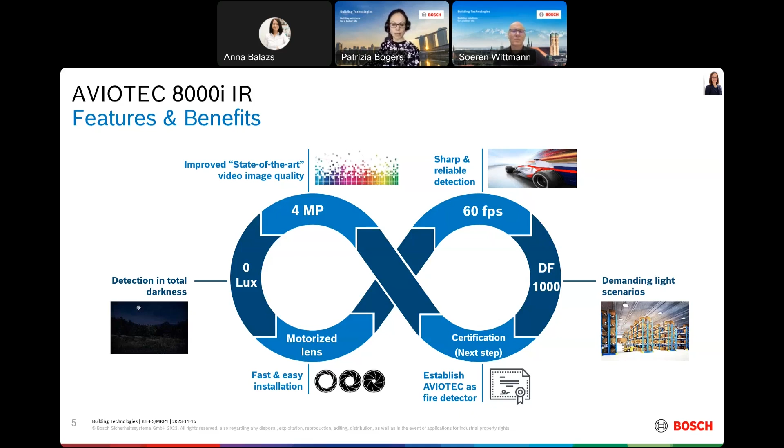So now we jump towards requirements and limitations, and let's check if Sören is connected to us. I hope you can understand me. So Patrizia, would be great if you can switch to the next slide.

Let's see what has changed regarding AVIOTEC, what we all know from our former product. For the new AVIOTEC, we go down to 1 lux detection in color mode and 0 lux in monochrome mode. As Patrizia said a few minutes ago, we have an integrated IR illuminator which turns on if it gets too dark. So therefore we have continuous detection from nighttime and daytime over the whole range of light illumination.

For smoke detection size and flame detection size, it stays at what you know. We need 1.6% of picture width to detect smoke and 1.1% to detect flame in the image. Regarding the maximum dynamic factor, specified by the darkest and brightest spot in the same image, we can now work up to factor 1000, meaning even if you have a very dark environment with 1 lux at one point of the image, you can have 1000 lux at another position in the same image.

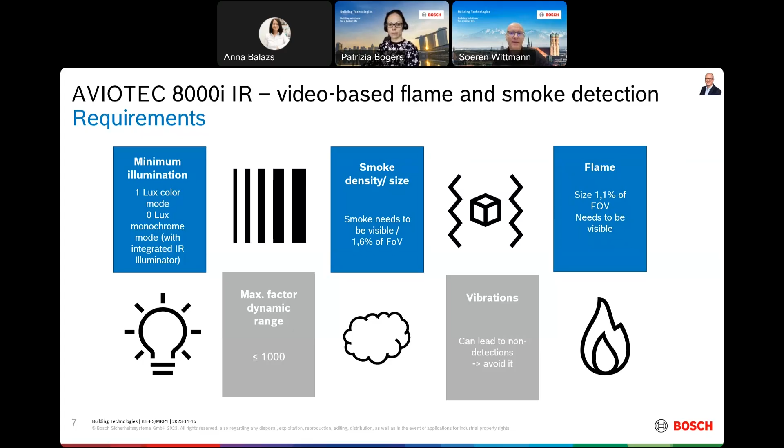Regarding smoke density, what is AVIOTEC 8000i IR capable of? We need smoke which is visible in the image, and this means it could be even very, very thin smoke which we could detect. With this approach, we could now detect smoke in the very early beginning phases of the fire, which is a great improvement regarding what you know in the market.

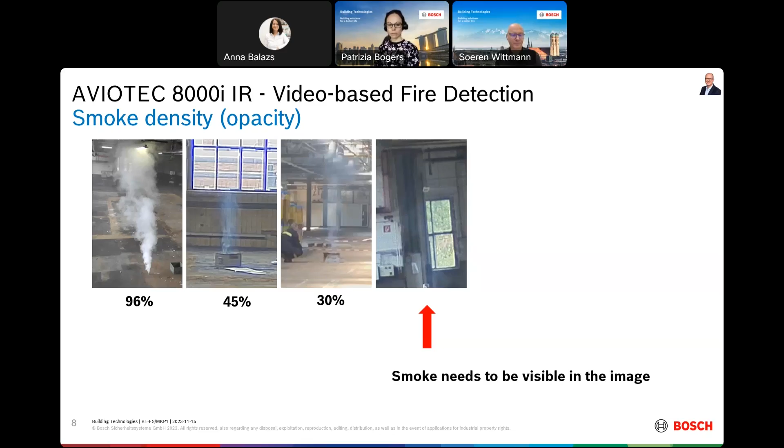Next slide please. The detection distances, as I said, the sizes we could detect in the image: 1.6% for smoke, 1.1% for flame, stays the same. The detection distances also stay the same as what we know from our former product. So here for 50 centimeter flame, we could detect at 50 meters distance, and also 75 centimeter smoke.

This is something around what you face from the standard test fires according to the EN54 standard. We could also detect at 50 meters distance. So 50 meters is the distance we could cover with the opening angle of the AVIOTEC. This table shows a little bit different opening angles and different fire sizes, and what distances could be covered by AVIOTEC.

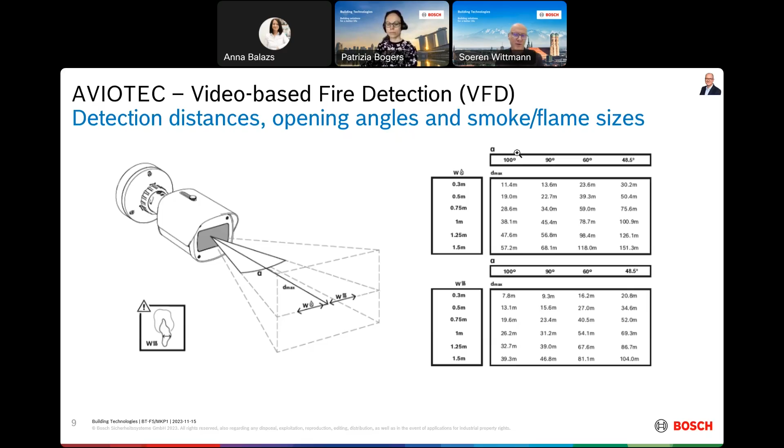So let's have a short look at how it works. Thinking about AVIOTEC, a video-based fire detection system, our intelligence is built into the camera itself, so we don't need additional servers to analyze the video footage. The algorithms are in the camera. The camera has the relays, alarm and trouble relay, and the camera decides if there is an alarm or not and triggers the alarm.

So how does it work? If we have an event somewhere in the field of view of the camera, a flame or smoke, the camera analyzes the video footage itself in real time and decides by artificial intelligence with deep learning if there is a fire or not. If it detects the fire, it triggers the alarm via the relays.

You could also connect, for example, video management systems to the camera to have this information transmitted via ONVIF, MQTT, and so on, to give the alarm to this video side of the detection. You also have optional connections, for example via cloud, which you can use to transmit the alarms and video footage to mobile devices. Later on, Patrizia will give you an overview of the use cases, what can be done with AVIOTEC.

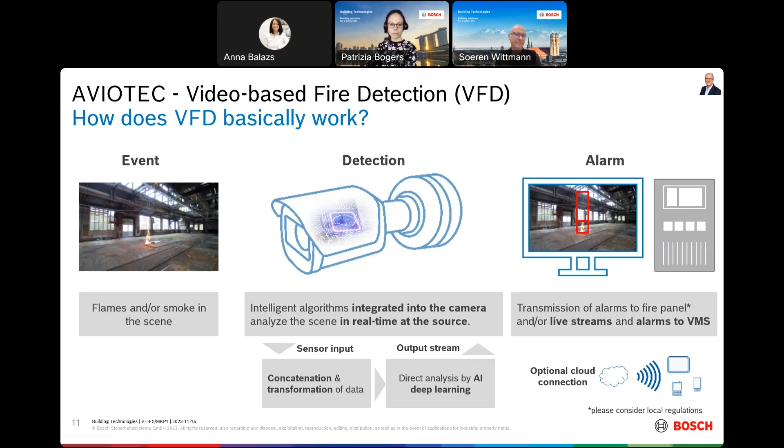If we look at fire development, there are two lines where we can work. One side is the smoke development if we have a smoldering fire starting, and then at a certain point you will have a flame which breaks out.

These are the points where flame detectors can detect, or if the fire is spreading and developing so the heat gathers below the ceiling, then a heat detector can detect. Regarding smoke detection, normally the fastest detectors are ASDs, aspirating smoke detectors, and then you have beam smoke detectors or point detectors which can be used.

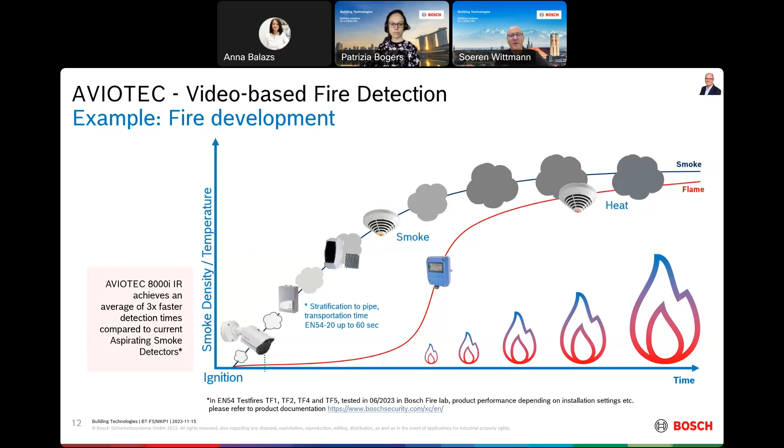Now Patrizia shows one of the videos from our fire lab. The setting is a TF2 test fire, a smoldering wood test fire with an illumination of 0 lux, so no visible light. What you see is the illumination by the camera, and what you can also see is that we have a detection here, at the left and at the right side, from 2 different cameras - one mounted very low and the other a little bit steeper from the upper corner of the fire lab.

As you see, even if the smoke is not well visible to the human eye, AVIOTEC has already detected it. The settings we used for this test were sensitivity of low in our fire detection and a verification time of 15 seconds. I guess this gives a good impression of what AVIOTEC is capable of.

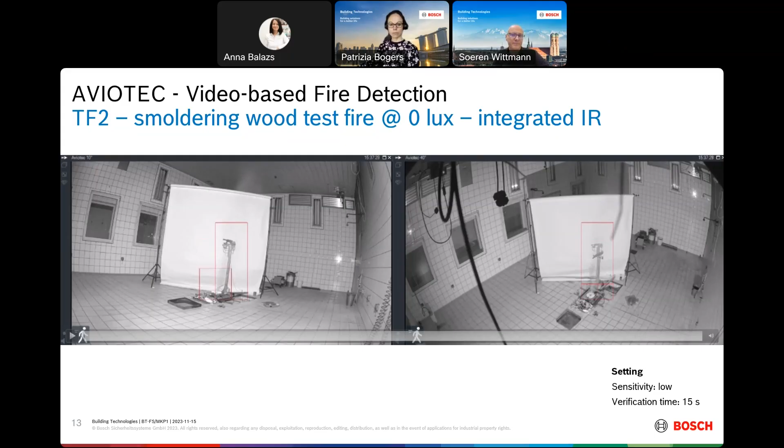Looking at the next slide, we can now go to the use cases and applications, but I guess, Patrizia, this is your topic. Thank you, Søren.

We have now heard a lot about specifications, requirements, and technology of the new AVIOTEC 8000i IR. Now we should discuss where the camera can successfully be implemented based on its features and benefits. First, I would like to start with some general basics. We all know there are 3 main objectives a fire detection system has to fulfill: it has to be fast, reliable, and robust - all at the same time, which makes it very challenging.

In this context, current state-of-the-art fire and smoke detectors might not fit every application. Given high ceilings, large semi-open or open spaces with possible dust and moisture, conventional fire detectors take too long to identify the hazard. They need additional maintenance and cannot be installed in semi-open or open areas. These are the limitations of conventional fire detection systems.

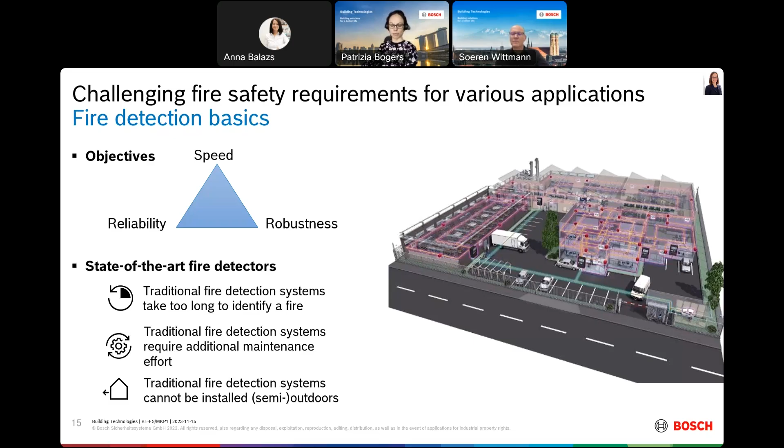Now, when it comes to AVIOTEC, with improved new features like the all-in-one solution, improved video image and scenery processing, robust IP67 housing, and improved, stable algorithms, the camera works effectively in many different applications and scenarios. The new camera performs fast, customized, and reliably on-site in indoor and half-open spaces, also in windy, dusty, humid, and steamy conditions, as well as demanding light scenes.

Key applications are places where high fire load material is stored that can easily ignite and spread over the area, as well as locations where overheating, brakes, or electricity can be a fire source. Thus it perfectly fits diverse industrial and manufacturing facilities like pulp and paper, food, textile, and automotive, and it also addresses applications in logistics and warehouses, shopping malls, hangars, train and metro stations, and energy premises.

Additional to these indoor applications, we want to develop AVIOTEC with improved features also towards outdoor applications, which opens the door for various further potential use cases like outdoor storage, parking spots, electrical car charging stations, and not to forget photovoltaic plants. Often AVIOTEC is the only solution in this context for smoke and fire detection that works in these challenging areas. We want to take the chance to develop and establish AVIOTEC as a well-known, customizable, innovative, and step-by-step certified and reliable solution on the fire detector market for all these applications.

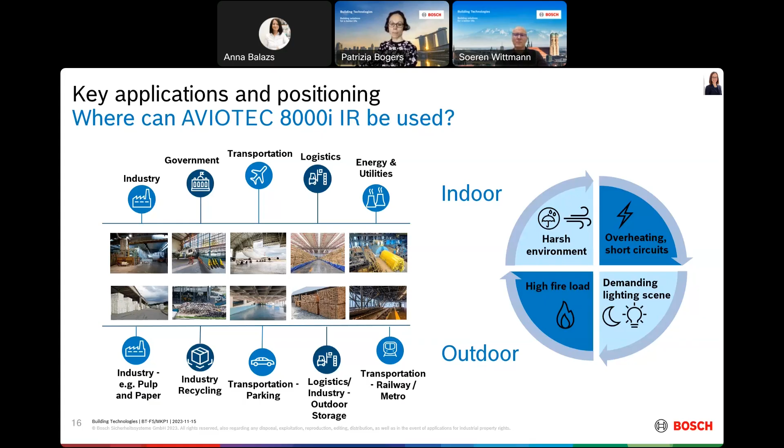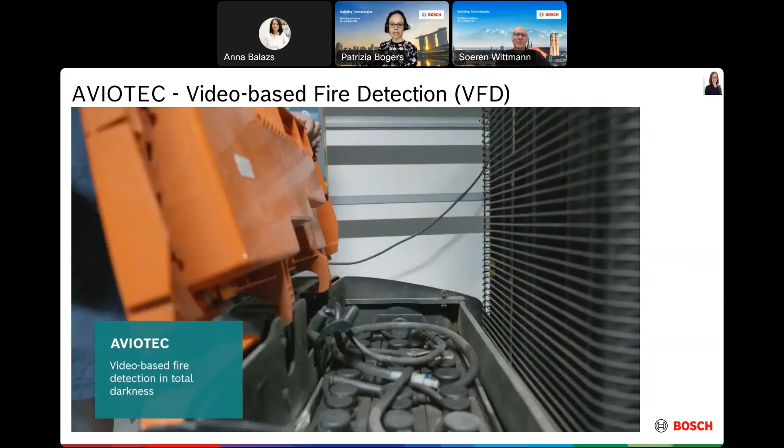Here you can see a video showing the performance in full darkness. It is an industrial application with an incident, how it can happen with charging logistic vehicles. You see the view for human eyes in a second, as well as this one from the perspective of the camera. It shows detection performance even in demanding light scenes like this one, down to 0 lux.

Now, after the pre-alarm session, you will quickly see that the alarm is triggered by the red box.

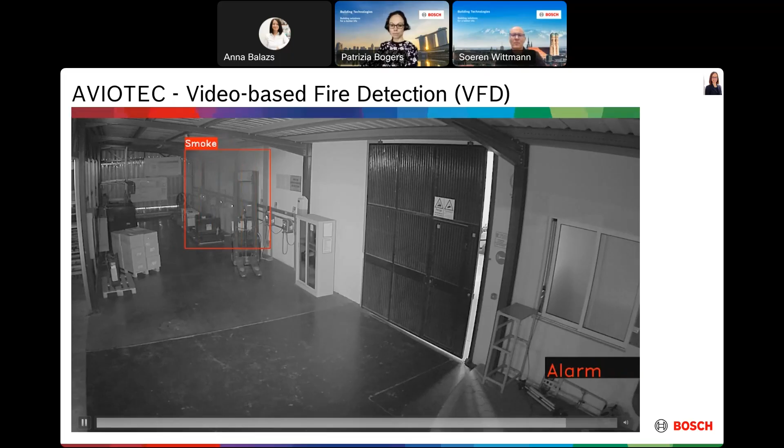In the next video, you see a typical application within the warehouse industry, where AVIOTEC can perfectly serve the need of early smoke detection. In large open halls between corridors of high racks, where it's hard to smoothly run conventional fire detection systems, the camera is able to detect fast and reliably, for example, this smoldering fire event that you see on site, so that countermeasures can be taken in time.

Again, the red alarm box, and now the countermeasure can take place.

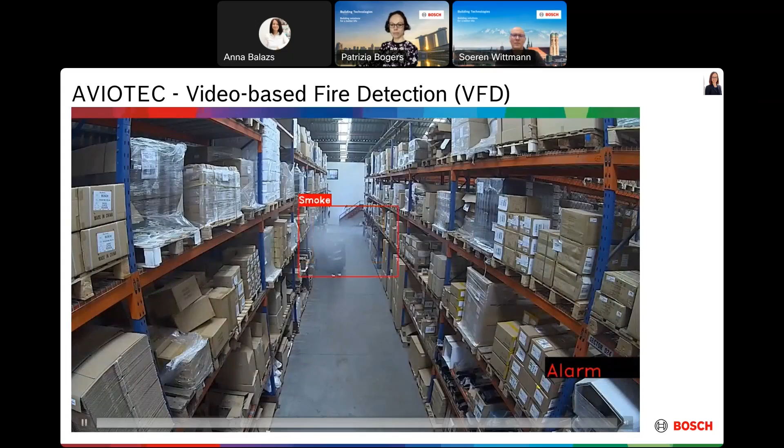So after these use cases and insights into possible applications for AVIOTEC, now we come to the already mentioned system overview of the camera.

First of all, there are two options to program the camera. You can either set it up via a local network by browser or with the configuration manager, or you program it remotely via router and remote portal.

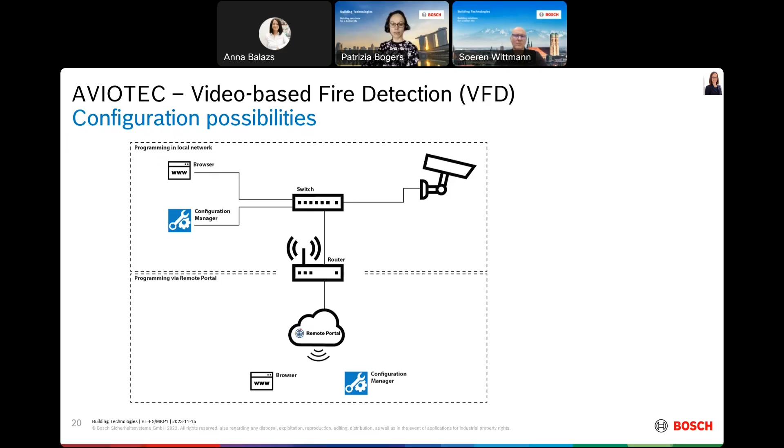In the next step, we want to give you an overview of how the output streams and signals of AVIOTEC can be connected and used as further triggers. First of all, you can connect the camera, as Sören has already mentioned before, to a network with different possible protocols via a network switch.

The camera contains two SD ports for recording the video and metadata stream within the camera. You can also do a larger recording on an external storage space like DIVAR or the BVMS.

Via network connection, one can connect the camera output to a local control station where trained staff can verify the alarm output given by AVIOTEC and decide whether to activate further steps in the safety chain. The station is connected either via browser, BVMS, or video security.

Another possibility is the wireless connection and alarm transmission via a router in the local network to desktop or mobile devices for further verification and monitoring. Moreover, you can connect the router to the remote portal, supporting further alarm transmission and verification in this way.

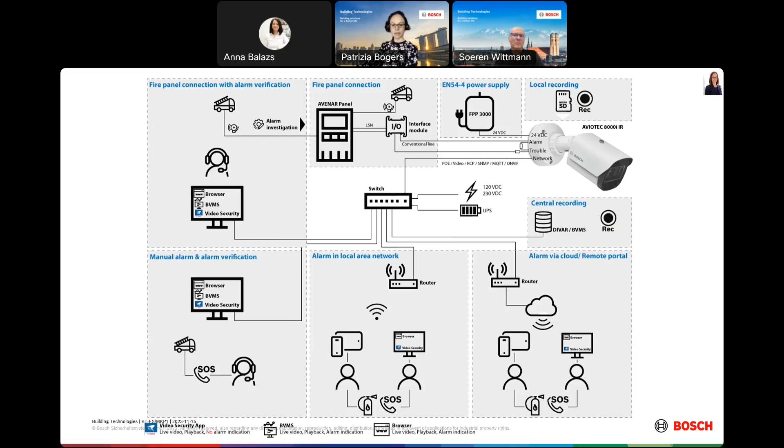All these options are able to be used in parallel. It makes the system more customizable, directly linked to the needs and requirements on site.

So with that, we come to the end of our webinar, and we hope we could give you an insight and understanding of the new AVIOTEC camera 8000i IR, its technology, specification and benefits, and why it is perfect for many different use cases and applications for superior customer specific fire protection.